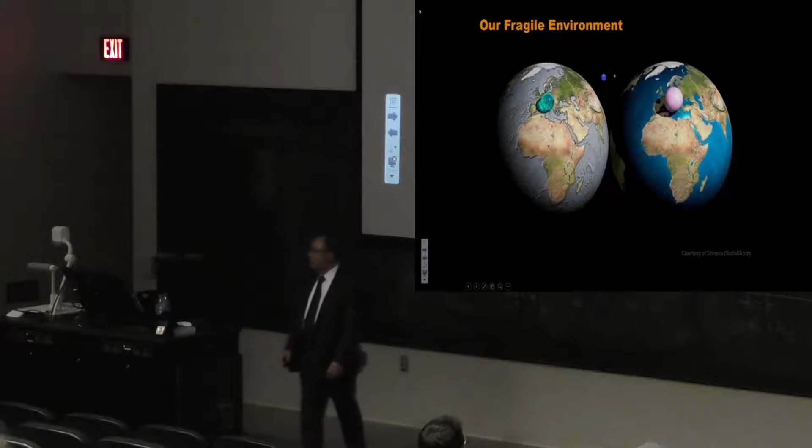So first, a little bit of background. I don't know if you've seen this image before, but the main part of it was put together by the European Space Agency a number of years ago. And it's just to give us a sense of scale about the environment that we're dealing with. So clearly, these two are images of the world. But those other little spheres on there have an important significance.

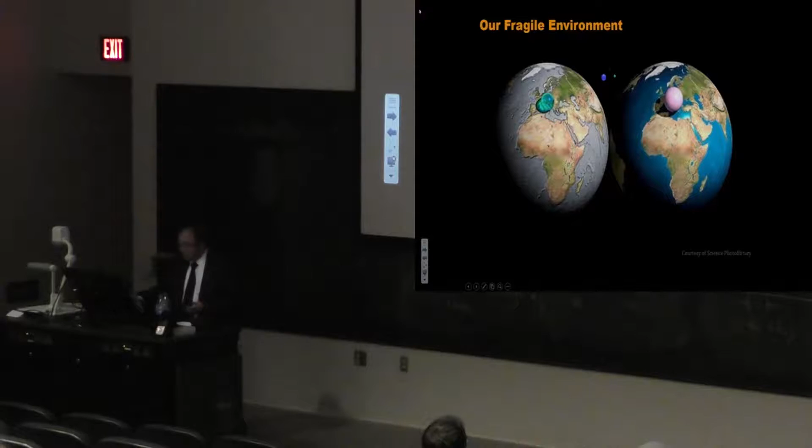If you collected together all of the water that exists on the planet's surface, the seawater, the fresh water, and everything, and put it together into a sphere, that's what you get over there, just to give you a sense of scale. That's all that there is. If you did the same with the atmosphere, you get that pinkish sphere over there. And to look at some of the others, let me just zoom in a little bit. So the Earth's diameter, 12,700 kilometers. That's the atmosphere.

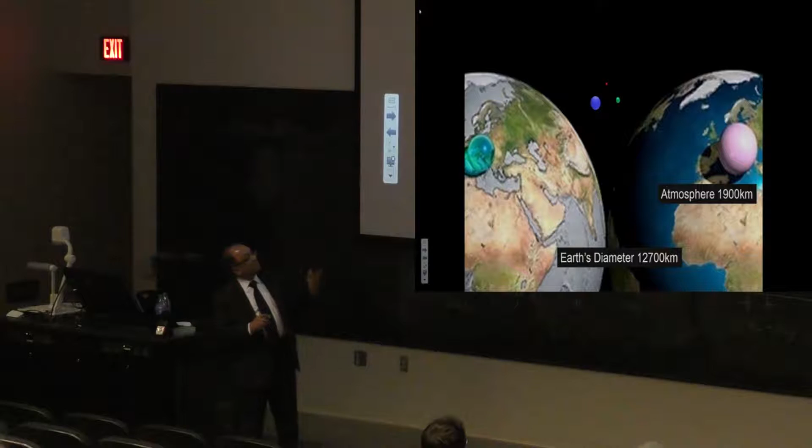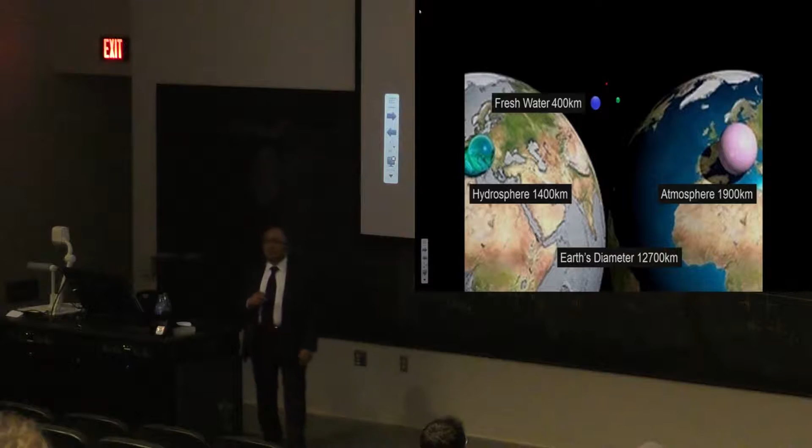There's the hydrosphere on the left. The fresh water is the blue sphere here. There's only that much of it available. The available freshwater, and by available I mean freshwater that's actually accessible by human beings for all of our activities, is an even smaller quantity. And you might be wondering what the little red dot is at the top. That's all of the fossil fuels that have ever existed. Okay, and we don't necessarily get a sense of scale about these different aspects of our environment.

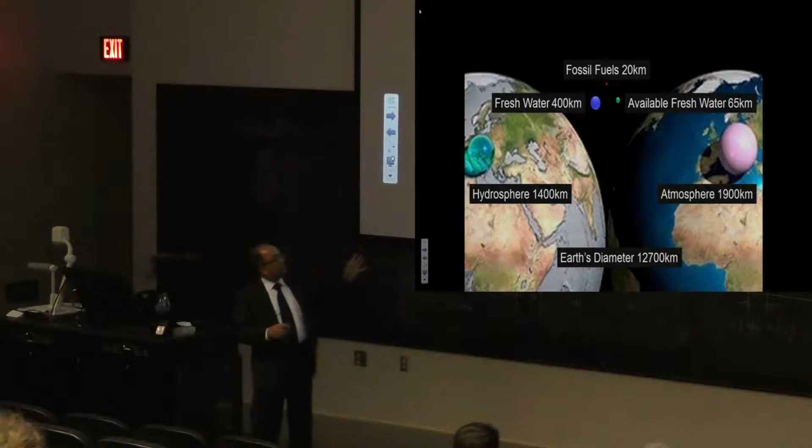The Earth seems so vast, but essentially we occupy this little thin layer on its surface, which consists of the hydrosphere, the land, the atmosphere, etc. And so with this kind of perspective, it's much more understandable how human activity can actually lead to the pollution and the destabilizing of this fragile environment.

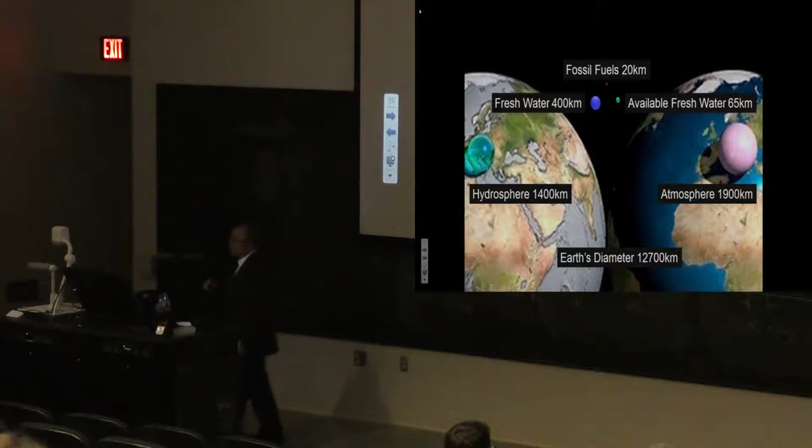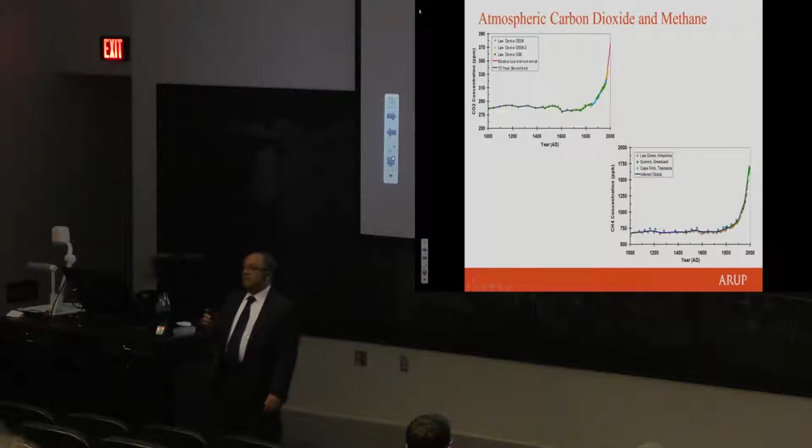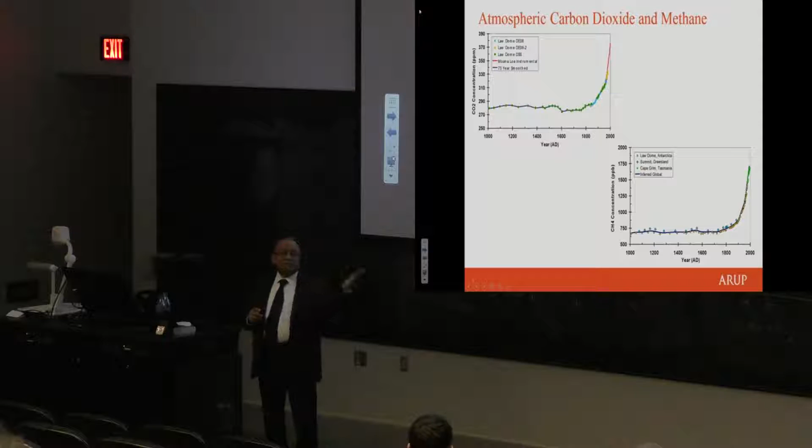And a much less talked about issue is the level of methane in the atmosphere. Now the figures for carbon dioxide are parts per million, the figures for methane are parts per billion. But methane is something like 10 to 20 times more active as a greenhouse gas in the environment. And we've been releasing lots of methane as well. And the main source of that is actually factory farming. So there is so much meat production taking place today that the methane output from all of those animals is creating measurable increases in methane in the atmosphere. Okay.

And carbon dioxide emissions from mankind are currently at about 34 billion metric tons per year, and that works out to about 5 tons per person on average, but all of us in the US actually emit on average 17 tons per person. So we're emitting about 3 times the global average.

This last number is subject to discussion, but there's growing consensus that the sustainable level of emissions, in other words, emissions that the environment can actually absorb on an ongoing basis, would really be closer to 2.5 metric tons per person, rather than the 17 we're emitting right now. So there's a huge challenge there. And all of this is known.

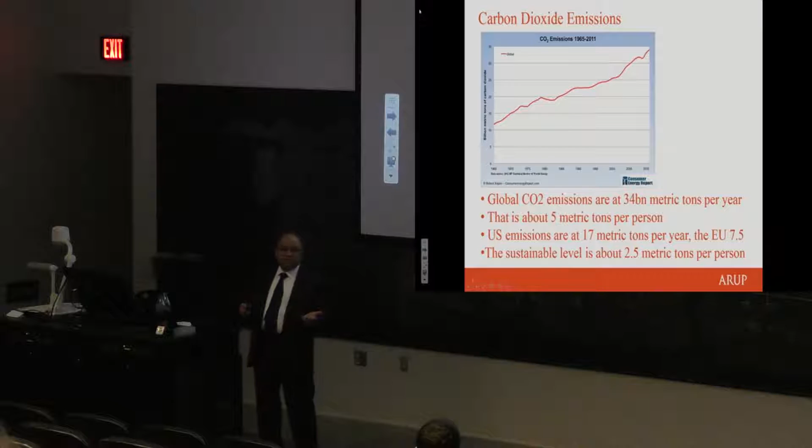Coming back to the question, what are we to do about it, particularly as professionals engaged in the building trades? I'll skip through these.

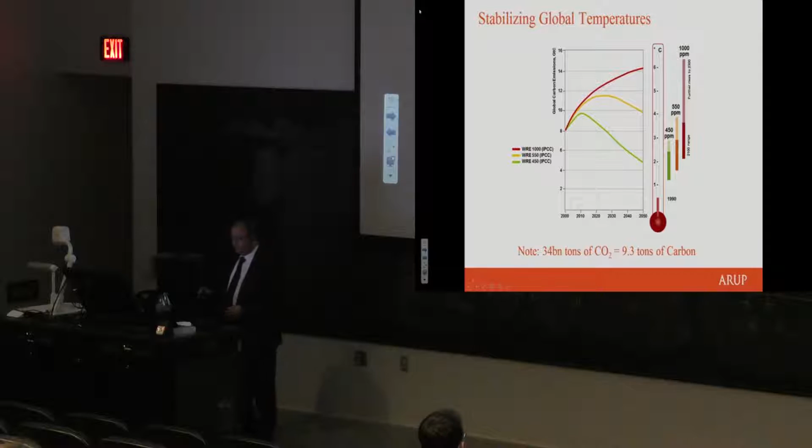These are various suggestions as to what might happen with global temperature, depending on the level of carbon dioxide. Scientists are urging us to follow the green curve down and not let atmospheric carbon exceed 450 parts per million. They say that if we actually get to 1,000 parts per million, the global temperature on average will go up by 6 degrees, with all sorts of catastrophic consequences. So again, it's a fairly scary picture.

Are we actually able to do anything about it? To try and get a handle on that, let's first look at what is happening in the US, specifically with regard to carbon emissions.

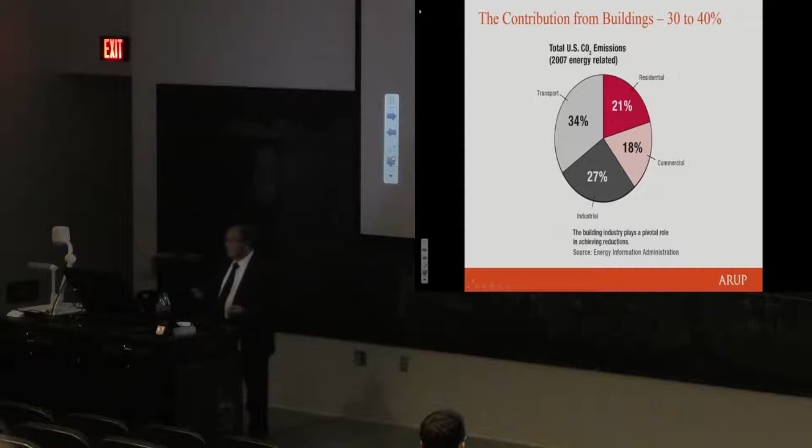You can see from this chart all of the emissions produced by the economy. 21% of carbon emissions are actually produced by residential buildings. That's much more than commercial buildings, which include all the institutional, educational, office buildings, etc. They emit about 18%, and residential emissions are 21%. So in total, about 40% of emissions are actually due to buildings.

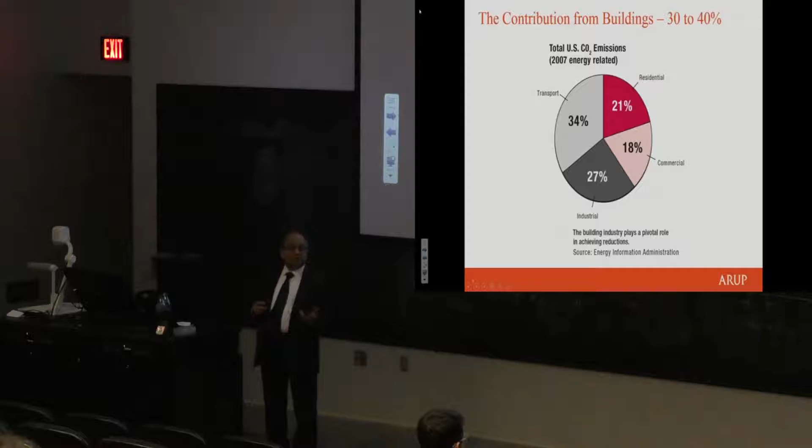So what does it really mean to us? That's what I did a little bit of research on.

The first thing is to say, okay, what sort of trajectory makes sense for America? There was a time when the Obama administration was trying to put an energy bill through Congress. It didn't actually get there.

So looking around, there are a few city jurisdictions that have actually set themselves targets. Seattle seems to be the one most aggressively going after carbon reductions within the city. I applied the sorts of reduction scenarios they had in mind to the whole American economy, and that's the kind of profile you get coming out of it.

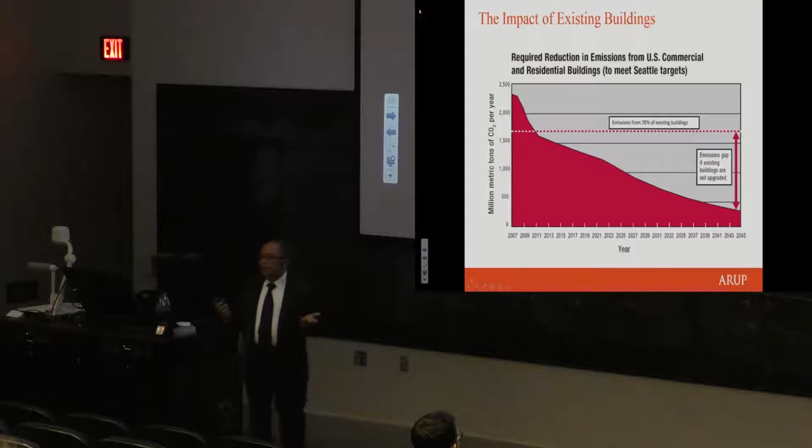Does that mean anything? Not necessarily. The important parts of that profile are the starting point, which is where we are now, and where we need to get to. Obviously, the sooner we can get there, the less impact we'll have on the environment along the way.

One of the things we have to take into account is that buildings actually change over on a very slow life cycle. If you think about the American population, it's predicted to exceed 400 million by the time you get to 2050 — I think it's about 450 million is the prediction. All of those additional people are going to need space to live in and so on.

I would suggest that the total quantity of buildings or built space in 2050 will be about 1.4 times what we have today. At the same time, buildings are renovated to some extent, but they have very long life cycles. Another estimate suggests that in 2050, 70% of the buildings around today will still be around, and they will make up about half of the building stock in 2050.

So these are all the relatively poorly performing buildings we have today that are emitting carbon at a particular rate. This dotted line represents the emissions from 70% of existing buildings. If we were to do nothing about those buildings between now and 2050, and they kept producing carbon at the same rate, we already have a level of emissions here which is significantly larger than the target everyone says we need to get to. So that's the first challenge.

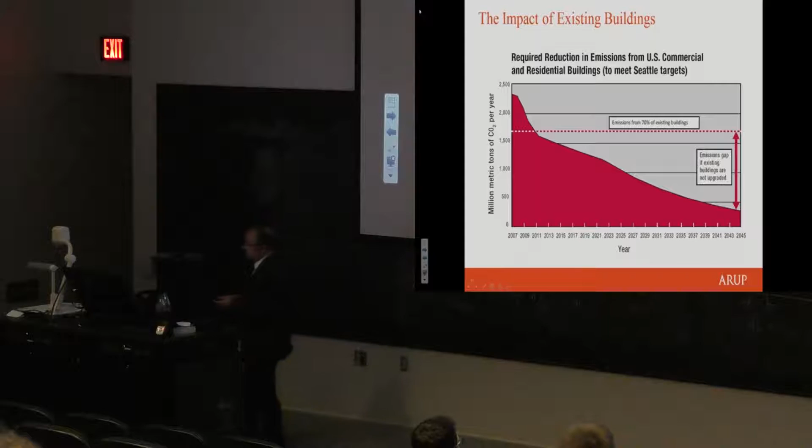Now, what about new buildings? I said that half the buildings around in 2050 will be new, half existing. If the buildings we build from now to 2050 perform the same on average as buildings today, that's how much emission we'd have in total. However, if we work hard starting now and make new buildings as efficient as possible, we still don't get to zero, but new buildings could emit something like 15% of what a code-compliant or average building today emits.

So this amount of emission we haven't given off yet could become much smaller with appropriate practice by the building industry, architects, engineers, etc. And if you look at the existing building stock, various UN studies suggest we could reduce those to about 50% of what they consume today, realistically, without knocking them down and rebuilding.

So with a following wind, everyone doing the best they can going forward to address both new buildings and the existing stock, where would our emissions be by 2050? Still significantly above, in fact 3 times what scientists tell us we need to reach. That's a sobering conclusion, and there are no signs, frankly, that we're doing things to make our buildings that much better.

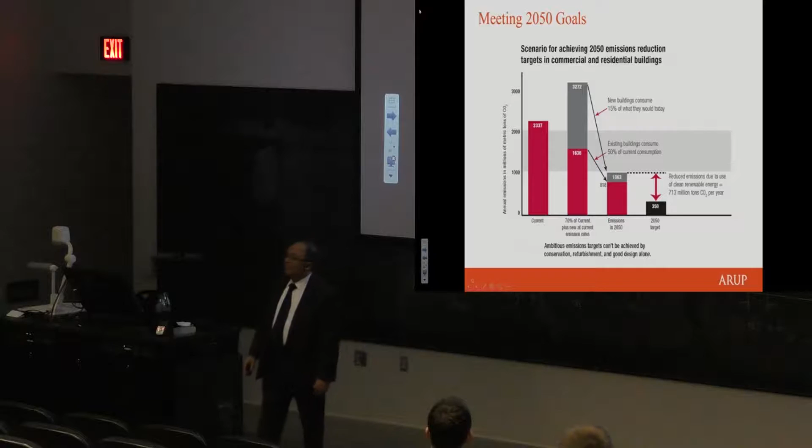I hope you'll see from this that it's important and that we should push hard. Thank you for the quote from Ove Arup—I think that was very appropriate for this. What he was saying essentially is, don't just do as you're told, push a little harder, try to get a better result. I think each of us has a responsibility in practice to do that.

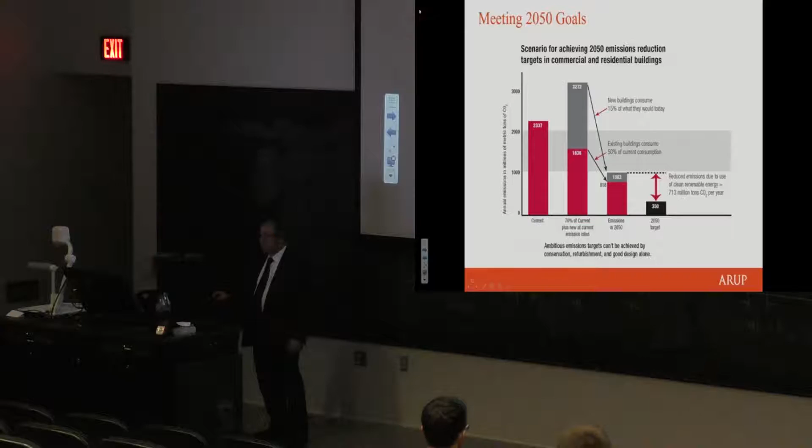The other question people often get caught up on is, what does net zero really mean? And then there are all these different types of definitions for what net zero means. Frankly, we're so far away from actually doing any of this that I think we should stop worrying about the fine academic definitions of what net zero really means, and just get on with it.

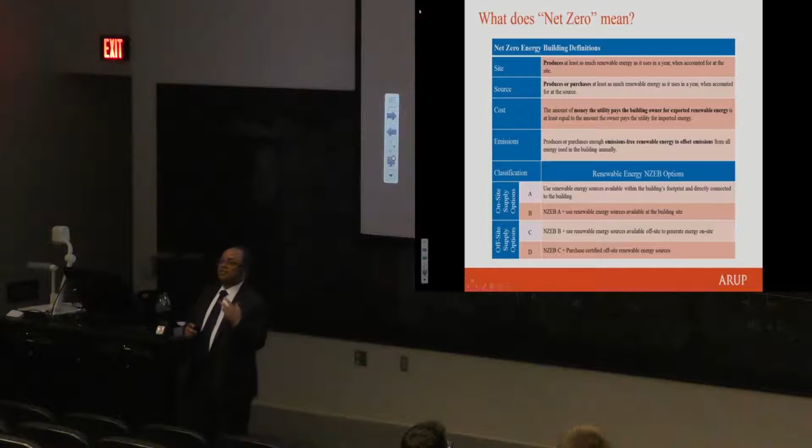The simple definition that I think will work for most of our purposes is to say that a building, over an annual cycle, generates as much energy as it consumes over that annual cycle. If we could get just to that point, I think we'd be doing an enormous amount to actually help reduce our emissions as a society.

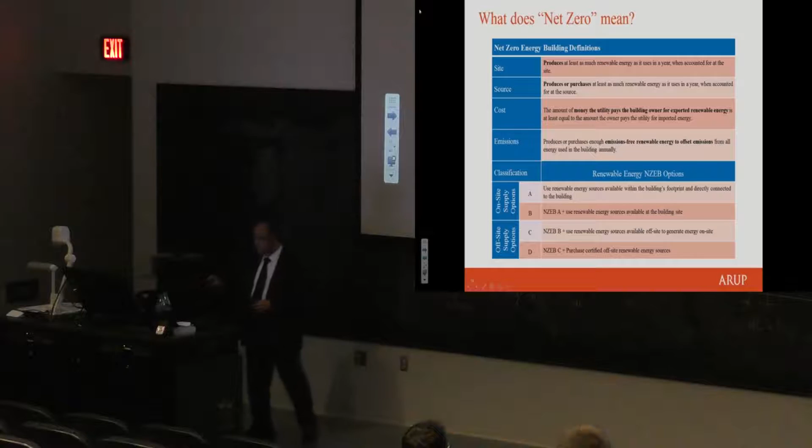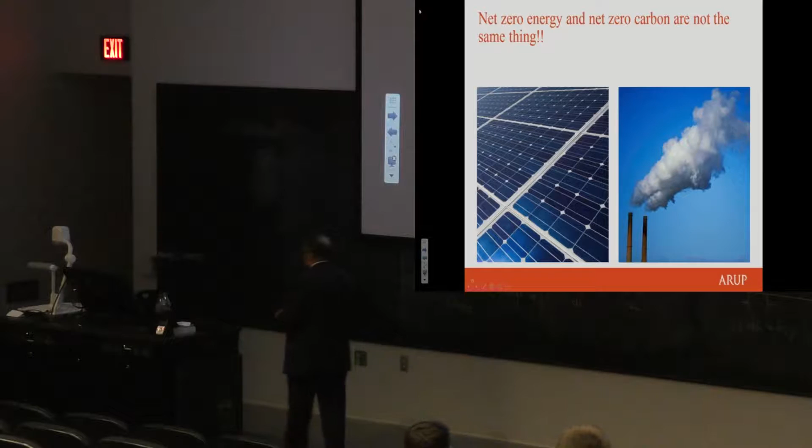Just be a little careful that net zero energy and net zero carbon are not quite the same thing, because if you're generating electricity on site using solar panels, that electricity is completely free of carbon. However, in winter months you need to import energy from the grid, which has a carbon footprint, even though you might export an equivalent amount in summer. So you can get into arguments about whether you're really achieving zero carbon by using the grid as a big battery, since you're assuming availability of energy from the grid, which typically has a carbon content to it.

But I think those are somewhat esoteric arguments, and we should just focus on making our buildings better as a first step.

So what are the stages in doing a net zero building? I think these are pretty obvious. The first one is to reduce the loading in the building as much as possible—reduce the need for energy-intensive systems in the design, and try to use passive systems as much as possible. I noticed all of the exposed concrete in this building, which suggests it actually works quite well as a passive building. I don't know if it plays out that way in reality, but passive design is a very important first step.

And it's only after you've extracted all of the benefits of those two that you would then go on to looking at active systems—actual energy-consuming HVAC systems, lighting, etc. Once you've done that, there's the whole issue of energy recovery. If you've put in a system to achieve a certain condition within the building, it's consuming energy, but it also has a waste stream of waste energy coming out. Can any of that be recovered and reused within the building? That's the next step, step 4.

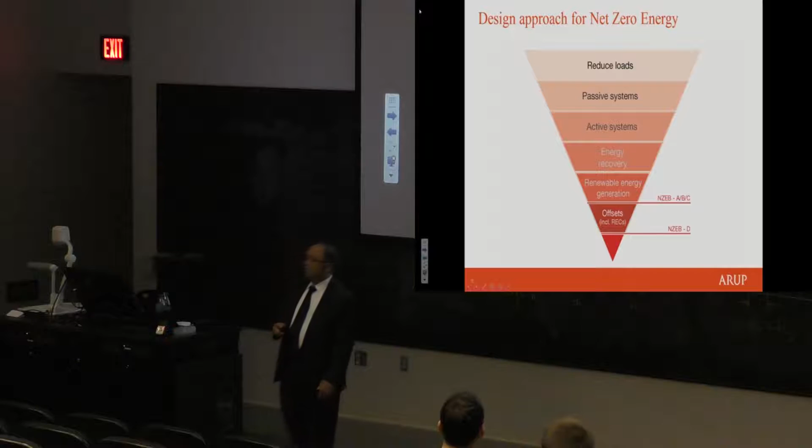So if you can't do renewable energy generation on site, the next step is to see if you can purchase green energy for the project. Now, some of these offsets have been discredited because there isn't a proper audit trail to confirm you're actually getting the green energy you're paying for. But increasingly, even our utility companies here have set up processes whereby you pay a little premium, but can be sure they're purchasing green energy to match the amount you're consuming in your facility. I'm able to do that at home, for example. I don't live in a net zero building, I'm sorry to say, despite all the solar panels on the roof.

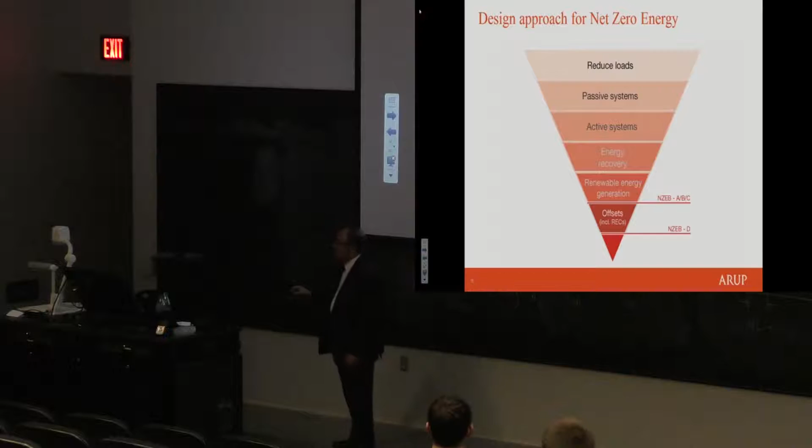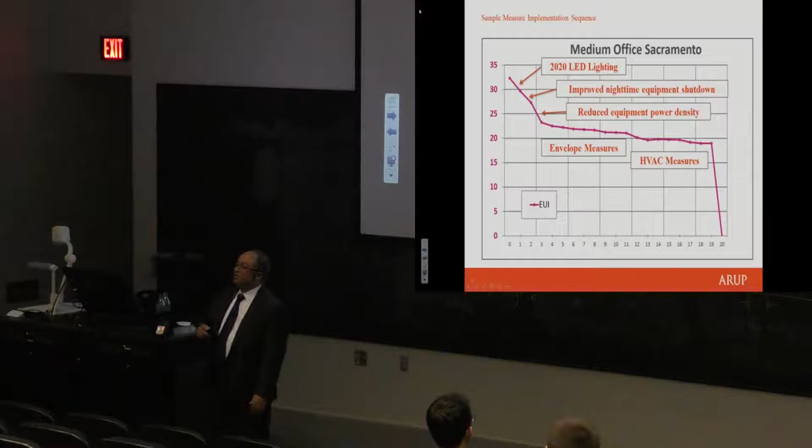So the sorts of measures you can implement in the design—these are all pretty obvious, so I'll just flick through them quickly. What this points to is that you finally end up with a certain minimum amount of consumption for your building. It's very difficult to get to an actual zero consumption building—perhaps an unconditioned bus shelter would be as close as you can get in that regard. So very often photovoltaics end up being the answer to make your building net zero.

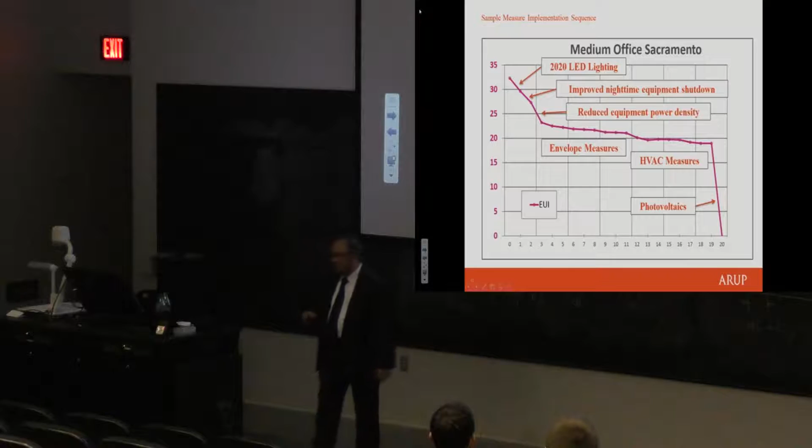Now that has consequences, and you'll see a number of buildings I show you where the photovoltaic array starts to dominate the architecture. This is something you need to think about as architects. To me, it's fine—I look at the photovoltaic array and say, great, we're generating clean energy here, but architecturally dealing with it can be quite a challenge. The other thing is the importance of scale.

If you look at just the building itself, the low-rise situation is much easier to deal with in terms of net zero. Also, buildings at a domestic scale, it's not a big challenge at all to generate as much energy as needed to power all the needs of a single-family home.

But when you get to dense urban environments, that's where you have the real challenge. However, it's important to look at this holistically, because when people live in this type of environment, there are transportation costs that come in, and the use of transportation to get to facilities, to work, to commute, adds up in terms of carbon.

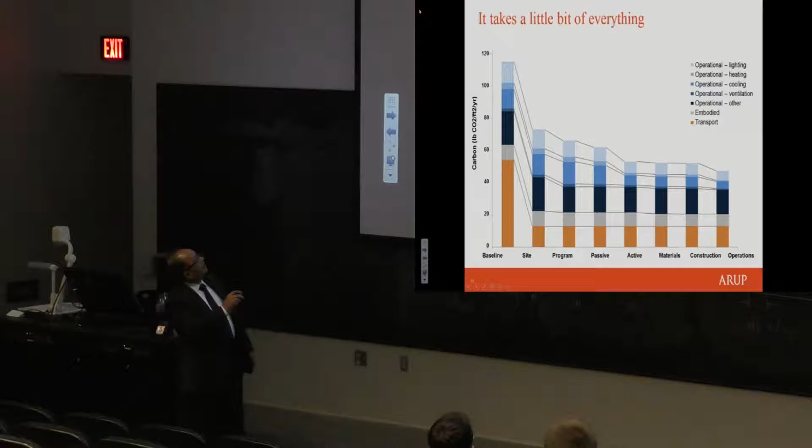So we did a study to quantify this. We initially took a low-rise development in the suburbs of New Jersey as an example. That's the graph on the left—everything up here relates to the building itself, and everything down here is the consequential carbon from having to get in a car to go shopping, etc. Adding it all up, it was interesting to note that almost half the carbon is due to transportation as opposed to the building itself.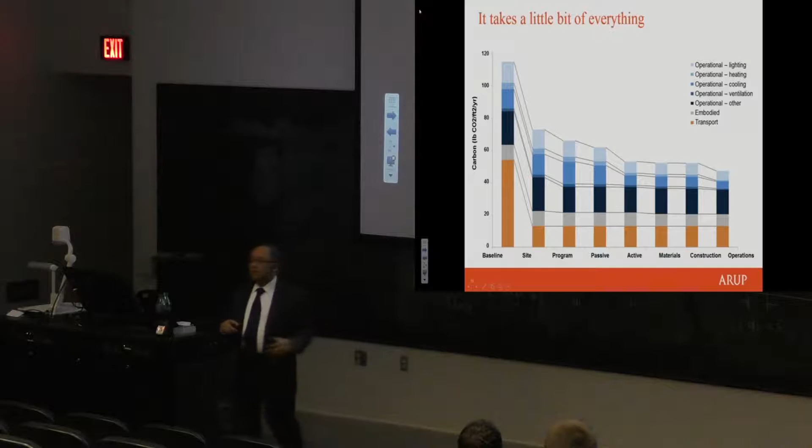So the first thing was, what happens when you move that building to an urban setting? Immediately you get this dramatic drop in the carbon associated with transportation. Now, this was a specific case study—if you change the parameters or do it for a different city, you might get slightly different results. But the point is you need to look at these situations holistically, and the fact that you've built a beautiful, self-contained, net zero building in the middle of nowhere doesn't mean it's the best thing you could have done for the environment.

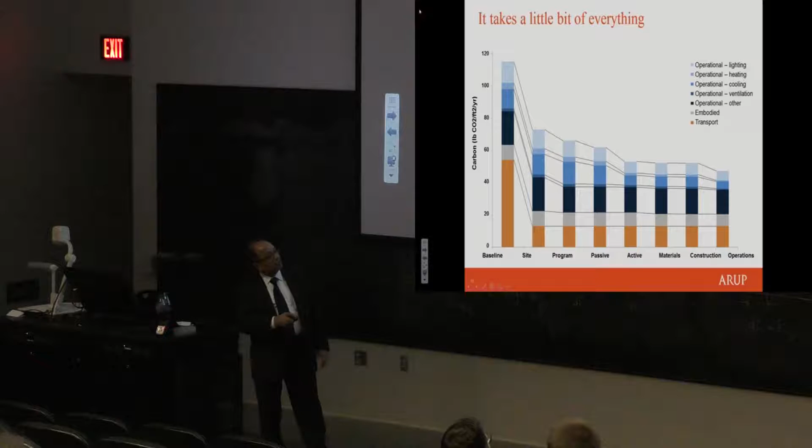Then all these other stages are different things you could do to lighting, heating, cooling, etc., to reduce the energy even further. This is about as far as we could get in this particular case in terms of carbon emissions. But the main point is that you need to draw the boundary a little wider than just the building itself when looking at these carbon accounting schemes.

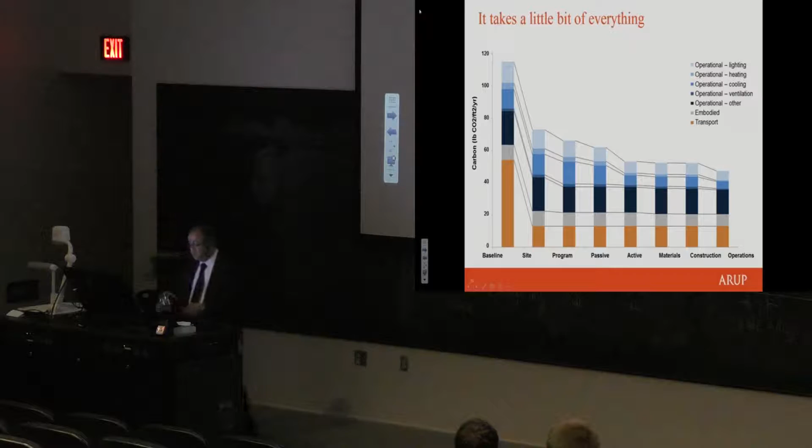This was an ambitious project that died as soon as the global financial crisis hit. But prior to that, these developers in Florida wanted to build a city that holistically considered transportation, etc., to achieve very low levels of carbon emissions. We started off with the average in Florida, which is 16 tons per person—I told you the national average was 17. It's a little lower there because of the slightly more benign climate.

Interestingly, you could make significant reductions just with density and land use strategies, by encouraging walking and all of that in the way the city was laid out—transport modal share and capture rate, meaning how many trips you can capture with public transportation versus people doing it themselves. Then there are energy demand reductions in the buildings themselves. These two elements are really more to do with transportation and urban design than with the individual buildings.

Then you get down to individual building reduction, and then alternative energy supply—generating energy on site, which in Florida would work extremely well. It's interesting to note that the regulations in Florida actively discourage people from exploiting solar energy. Scary, but that's the case.

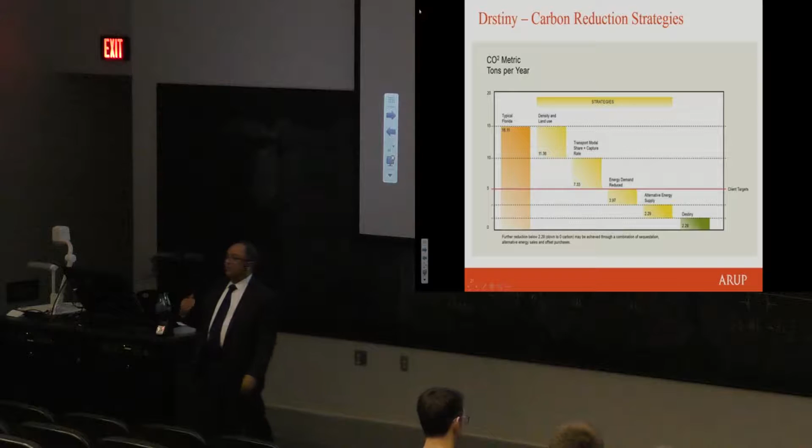We were actually able to get this total. Of course, this is theoretical—this was never built, and the big challenge is always to try and get what's actually built to match what you're designing or your intentions. But we showed it was possible to get down to 2.29 tons, which, if you remember from earlier in the lecture, is more or less the level considered sustainable. So what I draw from here is that we're not chasing something impossible, and we should actually be able to do a lot better than we're doing now in terms of carbon emissions.

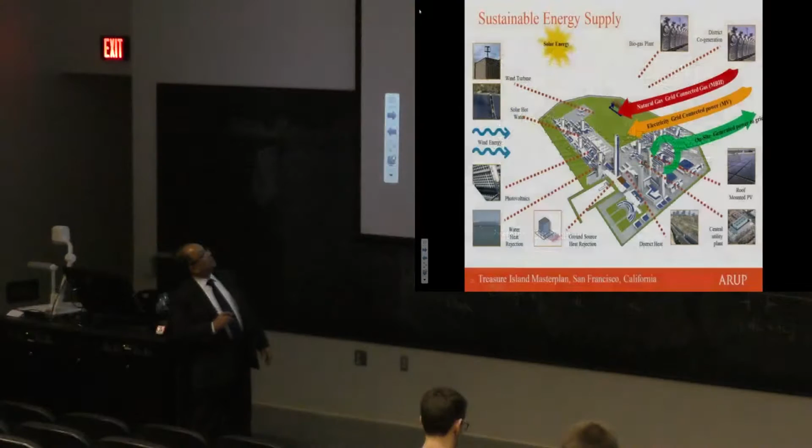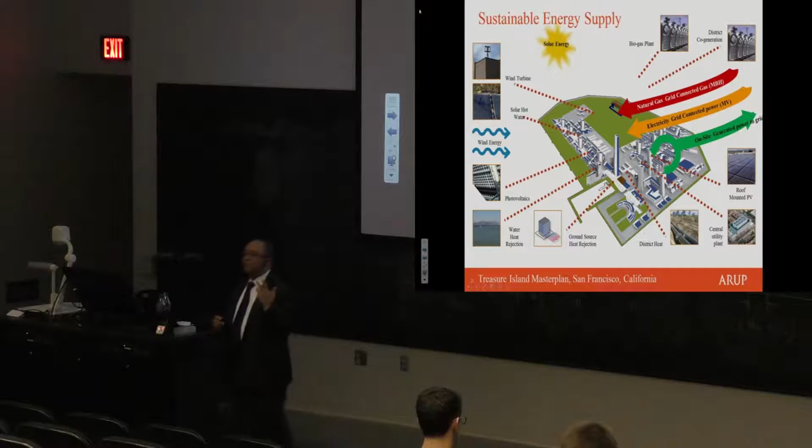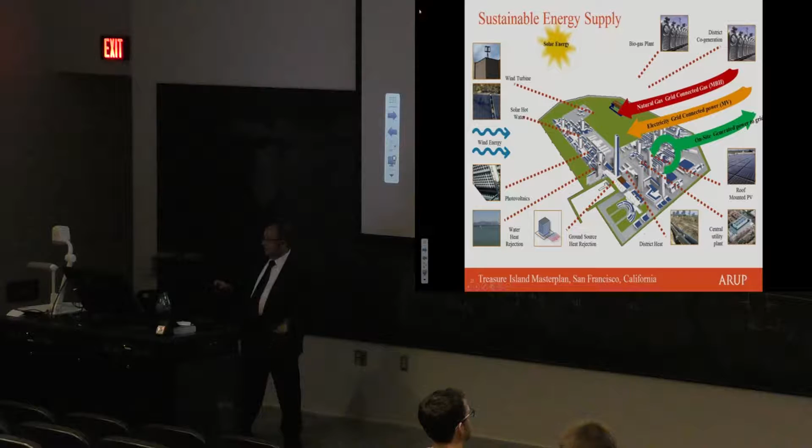The issues are complex. The Treasure Island development in San Francisco also started off with very high ambitions, which ultimately were not met, mostly for economic reasons. But in studying that particular project—I'm not going to explain this slide in detail—it's just a way of showing all the different considerations that come into figuring out the carbon footprint of a development, and all the different moves you need to think about to achieve a better design. That was done fairly rigorously for this development. It's a real pity it didn't proceed as planned, but it's still out there—it may yet happen.

There's also a seasonal graph that you have to overlay on this. I know from my own solar installation at home that generally I'm in surplus through the summer months, and I'm in deficit through the winter months, and the shoulder seasons more or less balance out. Seems obvious, but that's where we are with that.

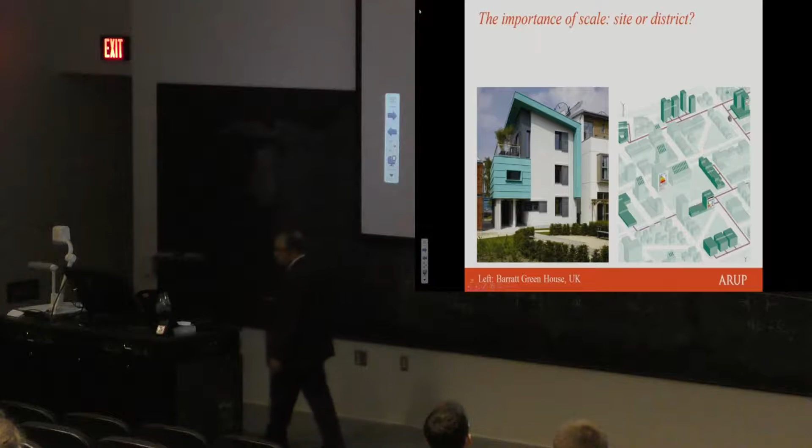So, are there examples of net zero buildings actually coming into the marketplace in a more ubiquitous way? There are in other countries. There are various commercial house developers in the UK that actually offer you a net zero product. This is one of them - Barratt Homes, I think it is. Yes, Barratt Homes.

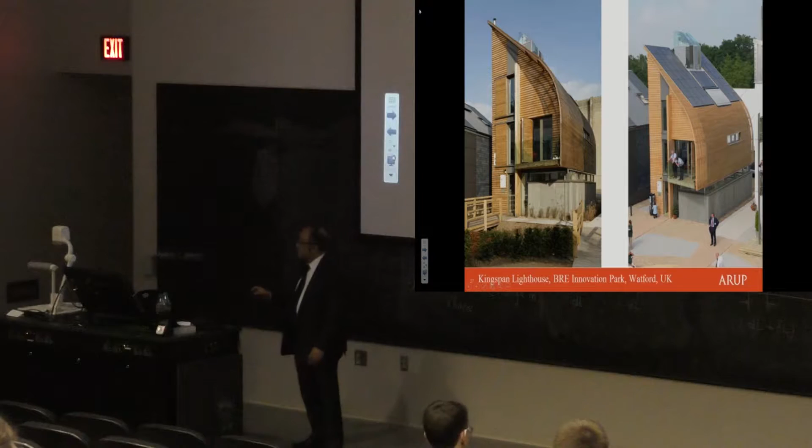And this is another one, the Lighthouse. I think this was more a demonstration project. Only one of these exists, as far as I know. They didn't then replicate it, although the design has been fully worked out.

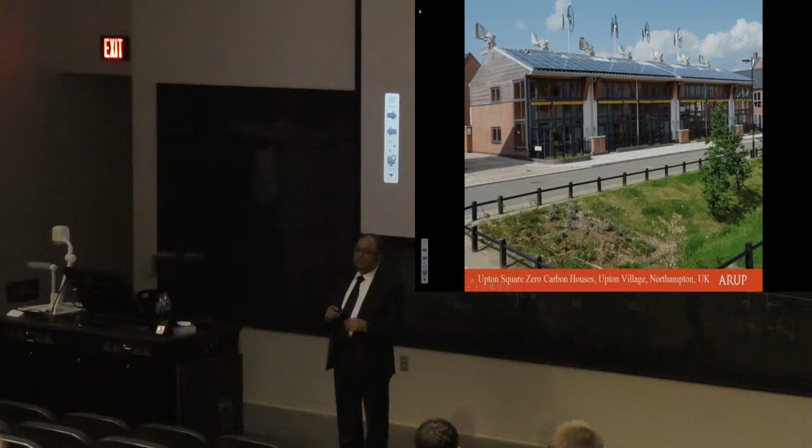And the best place for wind turbines is actually away from populated places, and the bigger they are in terms of diameter, the better they are in terms of efficiency. Also the bird life is able to deal with the bigger turbines more easily than with the smaller ones. So one of the big problems with wind farms is that you have a lot of bird hits on the blades, and then keeping them out of migratory paths and all of those things. That hasn't been considered enough, I would suggest, but the bigger turbines do better with those situations.

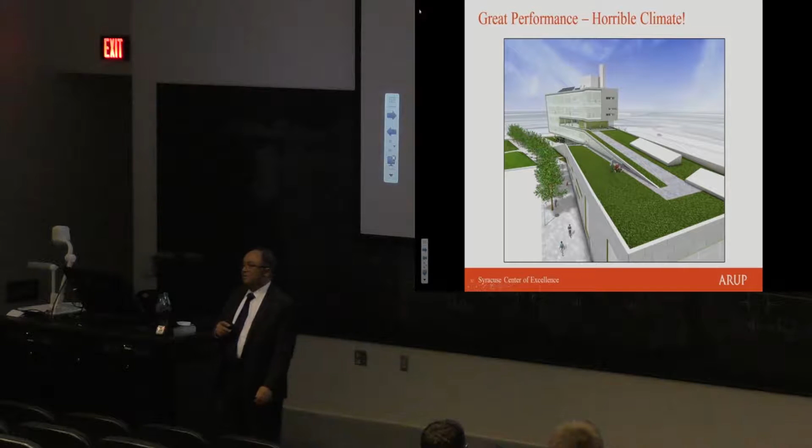Okay, also the impact of climate. There are many parts of the US where the climate is so benign that you could very easily, with careful design, actually achieve net zero. So this is the Renzo Piano building in San Francisco. It's very lean in terms of its energy requirements, but then it's in a place that helps you along with that. On the other hand, this project - sorry, I should replace this with an actual photograph of the building itself - Toshiko Mori's building in Syracuse. It's an extremely harsh climate, so to achieve a good level of performance here was so much more difficult given the Syracuse climate than it was in San Francisco.

Now, regulations have an important part to play in all of this. There's one argument that says just leave it to economics - the market will take care of it, and as the consequences of carbon and so on become manifest in the marketplace, economics will drive you towards appropriate behavior. I don't buy that for one minute. I have a few examples from my own experience.

So around 1999 or so, we were engaged by the United Nations to do a capital master plan for their entire site in New York. A part of that was to really look at their energy consumption and emissions within their facility. When we did the study, it turned out that those buildings - they were beautifully designed, I must say, as we went into the drawings and actually took apart the facade on the Secretariat building. You could just see the care with which that whole complex of buildings was designed and constructed. But anyway, we found that the energy consumption was ridiculously high.

It was something like 4 or 5 times what a contemporary code-compliant building would consume. So obviously, anything we could do to reduce energy would be important for the future of the project and for the refurbishment. So one of the things that came up was, should we change the facade on the Secretariat building? It was a single glazed facade, so it had no real thermal value, and the glass was clear, although there had been various attempts at various times to put reflective films and things like that. They were never successful.

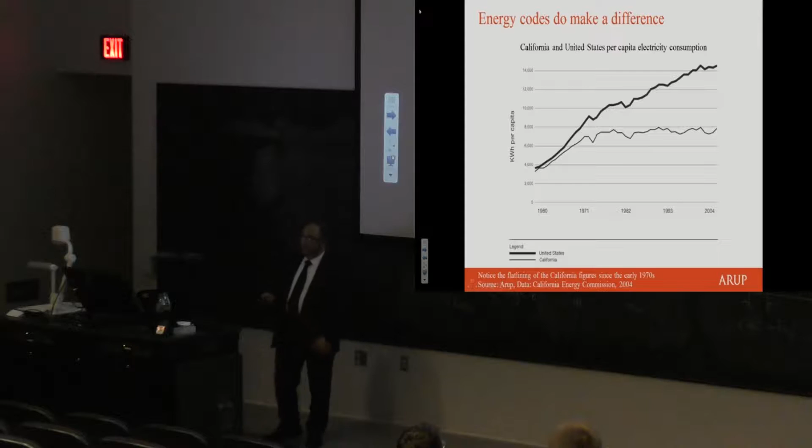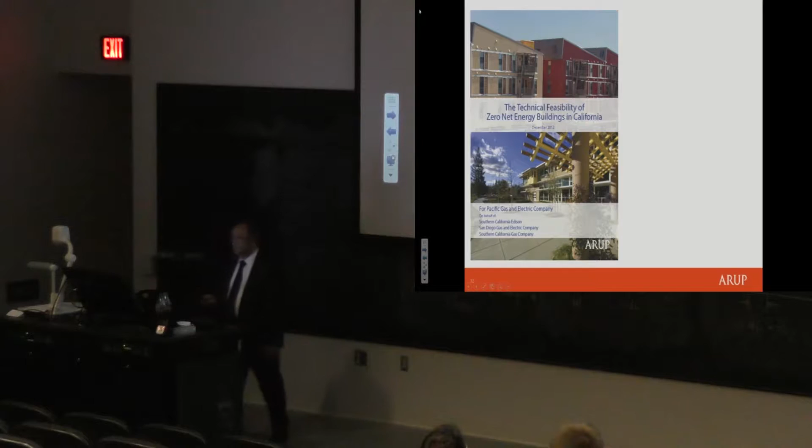If you look at the US as a whole, that's what's been happening in the country as a whole. And the only difference is that you have these strict regulations in California where they're focusing on energy consumption, they're implementing energy-saving measures in their vehicle fleets and buildings, etc., and that isn't being done everywhere else. So this isn't economics, it's pure policy at work. And at ARUP, we've got a research wing that actually helps authorities develop guidelines and so on for net zero buildings, amongst other things. That's just an example of those.

So another trend is, of course, the whole ASHRAE code for energy conservation, ASHRAE standard 90.1. And this is just a graph showing how the requirements in that code have been ramped up year on year. And what usually happens is ASHRAE will produce a new version of their code. It'll be out there, people will look at it, and then various jurisdictions will start adopting it for use within their state. It usually happens at a state level, sometimes at a city level. So again, some jurisdictions are quicker with this and they'll adopt the latest code pretty quickly. Others are a bit lazy about it, and they'd still be referring to a code that's several generations old. So you might say that yes, your state energy code is based on ASHRAE 90.1. It's very important to ask the question, well, which version of this, which particular year is it based on?

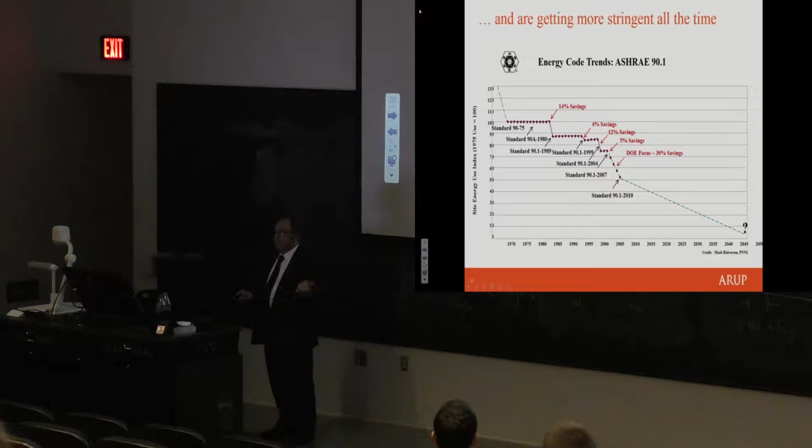And the thing is that even with the most stringent standard today, which is quite hard to meet, we're still nowhere near getting close to something that would help us with our carbon emissions unless we also go the extra mile on the generation side to put in the energy generation. Now, ASHRAE as an energy code is basically limiting your consumption of energy in the building. Are there any codes out there that actually mandate the need for net zero buildings? Well, not in the US and not yet, but it's expected that US federal buildings will be required to be net zero by 2030. There's a plan for that. Will it come to pass? We don't know. 2030 is a long way away.

But the United Kingdom, as of this year, is already requiring certain types of residential buildings to be net zero, and various European Union regulations are also coming in within the next few years. There was some talk of California residential buildings having to be net zero starting from 2020. I don't quite know where that is at the moment. I don't have the latest information.

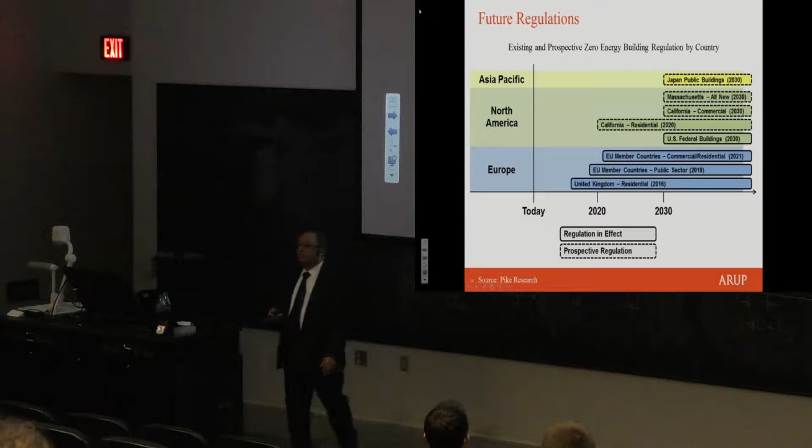But you can see that the US federal standard there is a regulation that's already in effect, but 2030 is a long way away, as I said. And these EU and UK regulations are also already in effect. So there is momentum building. The question is, can we do it quickly enough? But I would say that the speed at which we implement these things is less important than the effort we put in to just make a difference in every project that we're doing, to do more than just the bare minimum.

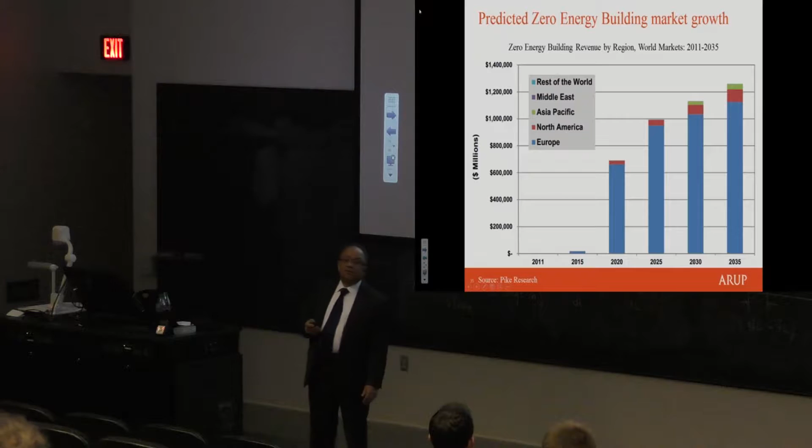So there are various predictions of market growth in net zero buildings. And you can see that the prediction in 2015 was pretty small, but for there to be a dramatic jump in net zero buildings, mainly driven by the European market. And we're beginning to see that happen already from our activities in Europe. In fact, when we got involved in the design of the US Embassy in London, the criterion for that building started off being net zero, that it would actually generate as much energy as it would consume. Interestingly enough, after two rounds of value engineering, it's back from that particular target, but nevertheless, it's doing a lot better than a simple code compliant building.

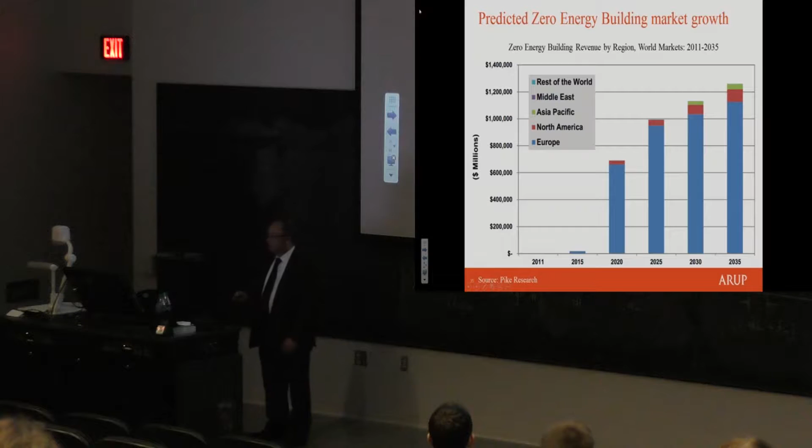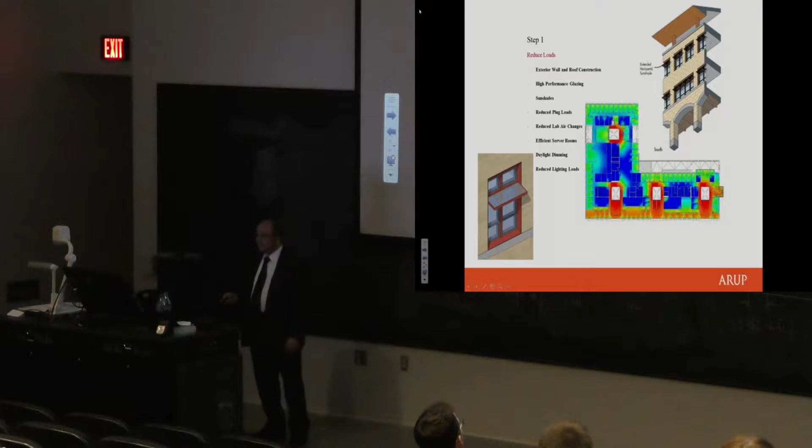So some more examples. Again, you'll find some of these are in climates that are much more benign. I don't want to take up too much time going through them in detail, but you can see the combination of passive and active means to achieve low energy performance. There's one example that I know of a net zero building in Hong Kong. This one recently opened. I don't have the actual photography for it, but again, you can see the dominant solar roof on the project, along with a bunch of other strategies, including the use of fans rather than air conditioning in some of the spaces.

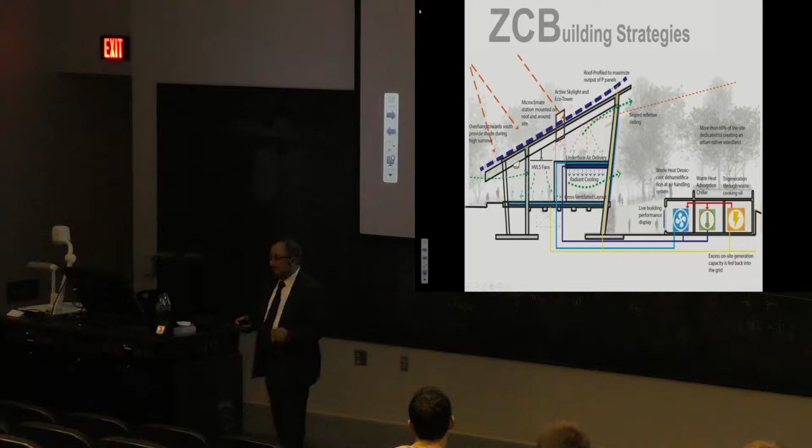I'm actually surprised that outside of the domestic sphere, we don't use ceiling fans more in the buildings that we build here. We tend to go straight for the air conditioning. They are actually a very effective way of improving comfort, particularly in spaces where the comfort is not that critical. They can allow you to get rid of air conditioning, but create an environment that's much more pleasant than just sitting there in still air at that particular temperature. Just in case anyone decides to call me on this, a ceiling fan does not cool the air. It's just moving the air around, so it's giving you a perception of improved comfort rather than reducing the temperature within the space. But it can be effective in certain applications.

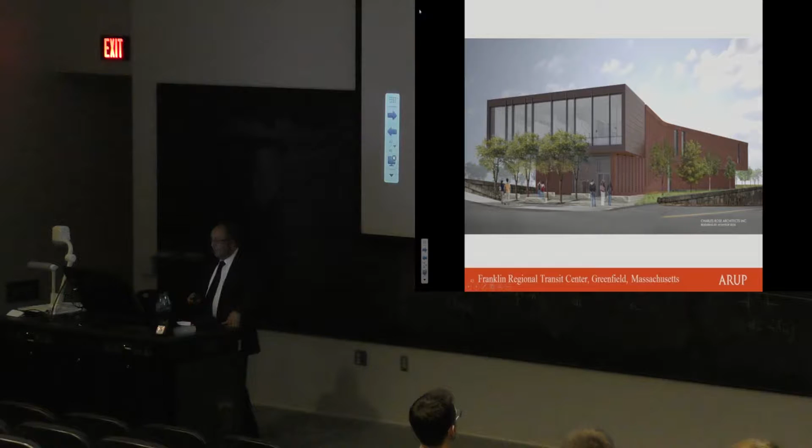Samsung putting efforts into developing these projects. This is also a project that opened recently in Massachusetts. It's a transit center, the first one in the country that's net zero. And you can well imagine that the roof is covered in solar panels. It is. And a courthouse as well. This is still in development. In this case, there are wind turbines as part of the project, but they're located on the site rather than on the building, which is a little better. Massachusetts is kind of on the edge as to whether wind turbines actually work there. So let's see how that goes. I've seen a few motionless wind turbines in the Boston area.

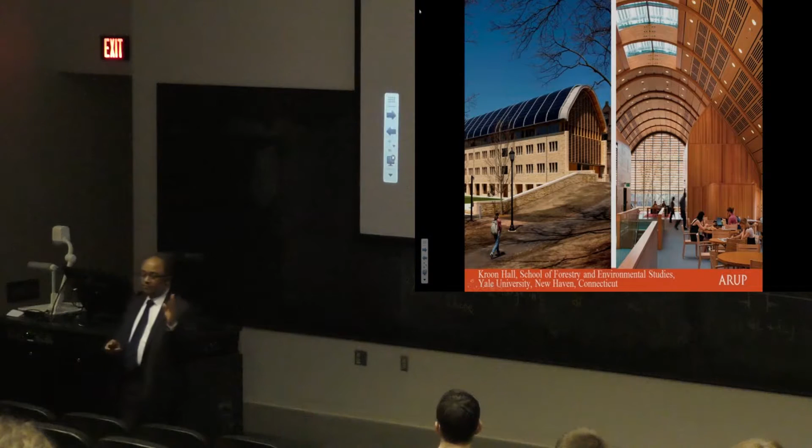And then there are buildings like this one, Kroon Hall. In this case, we couldn't actually get the building to be net zero in and of itself, but Yale decided that they would actually buy audited offsets to make up the energy that they couldn't generate on site with the solar panels that are on the roof. So it's net zero in an overall sense, but not in a site sense. And then this is PS62 on Staten Island. Again, notice the fact that the solar panels essentially take over, right?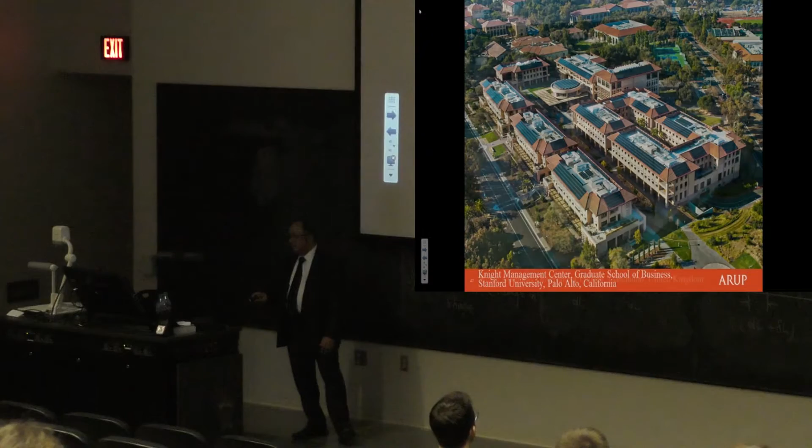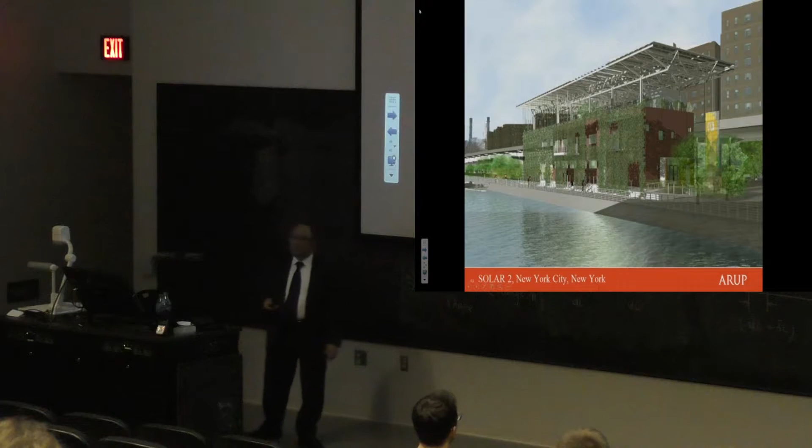And one particular building typology that you'll see coming up more and more, and I'm going to finish with some examples of these: the building underneath with a solar canopy at the top, creating a space underneath the canopy that can be used for various things, using the canopy for generating energy as well as collecting water. That you'll see coming up more and more, and I have a couple more examples. So this is one we're doing in New York City. It's a project that started years ago, and it's still just chugging along.

Meanwhile, there's this one in Acapulco that started much later, and it's nearing completion, actually. You can see the photograph there of it nearing completion. I'm perturbed to see that there are no solar panels on the grid that's up there. I hope that's because they just haven't installed them yet, and not that they've been value engineered out of the project, which would make a nonsense of this entire canopy structure up there, which was supposed to create shade and capture water in a semi-arid part of the country, etc.

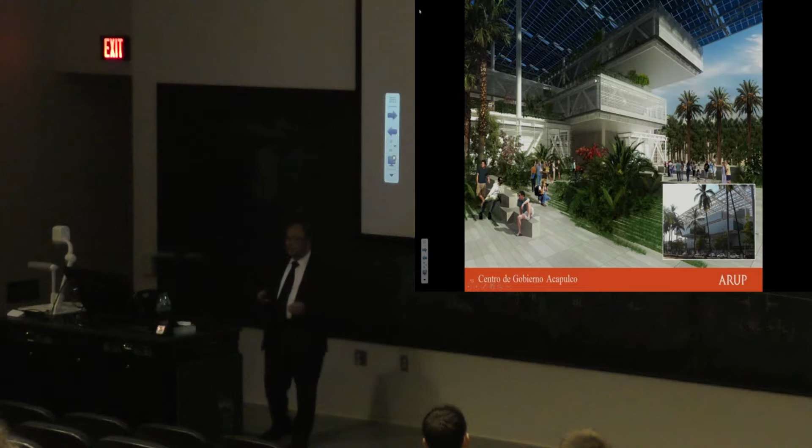So one of the other problems at some of these buildings is that the generating facility actually becomes an important part of the architecture, and what happens if it's removed for some reason? The whole concept falls apart. Enrique Norten is the architect for this, by the way.

And yeah, I think that what is interesting about this one is to hear the architect in his terms talk about the importance of it being a net zero building. So it's, I think, a message to all of you that you need to figure out your own positions with regard to this, why you think it's important, why and how you're going to build it into your projects, and what you say about your projects.

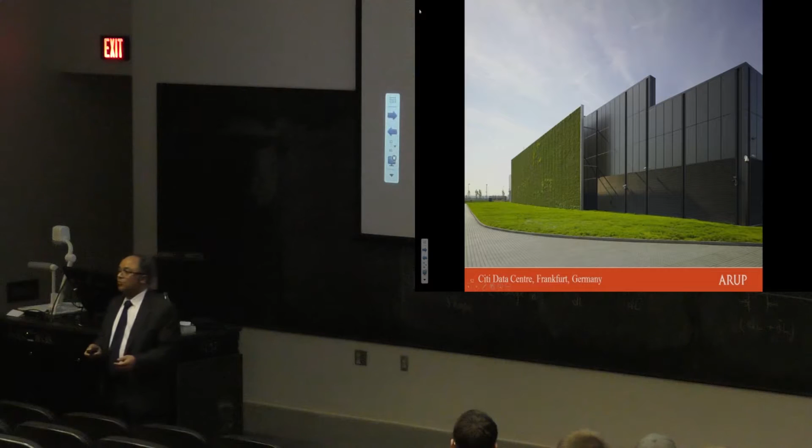Right, and this is a bit of an aside here, really. A data center. So we all carry around these little devices, and we're extremely happy with the fact that you charge it up once a day, and it lets you do all this stuff throughout the day, and it seems to be extremely lean in terms of energy consumption, etc. Underlying all that technology, you have monsters like this. This particular one is not so much of a monster because it was perhaps the first attempt at doing a green data center.

There are some estimates that suggest that 2% of global carbon emissions are due to electricity consumption in data centers. So these things are not put in population centers. They're usually in the middle of nowhere, close to sources of power, or in environments where you can get cooling more easily or whatever, and they are huge energy hogs. And the whole internet technology revolution is really built upon these things.

And the traditional way of designing these was to basically sacrifice everything for the sake of reliability. So many of them would even have systems where you were simultaneously heating and cooling because no one cared about the energy consumption. It was the reliability that was uppermost in people's minds. So there needs to be a whole refresh of data center design to find ways of minimizing the energy consumption there, because as I say, it's a huge load and one that we're probably not aware of at all in our daily lives.

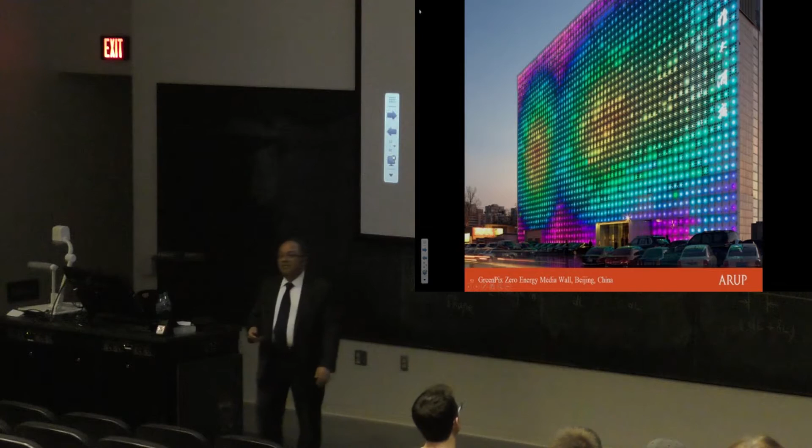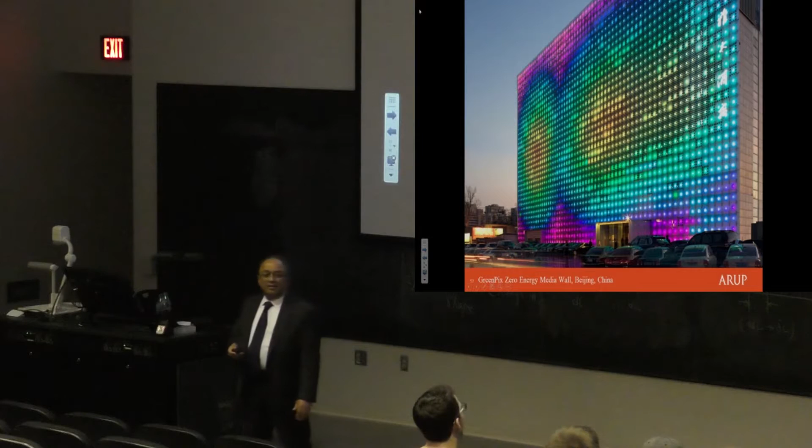And this is just a bit of fun. It's a display on the side of a building in Beijing that's made up of both solar cells and LEDs. And during the daytime, the solar cells harvest electricity. It's stored in a battery. And at nighttime, you get a little art show on the facade, and it runs until the electricity runs out, and then the next day the cycle starts again.

Okay, so one of the challenges has always been in the urban context: can you get enough energy harvested in a high-rise building to meet all of your needs? And the answer until recently was no. We did a research project with an architectural firm called Kiss + Cathcart and Rutgers University, and started looking at various technological trends that include high-performance glazing and glazing that has selective coating so that it lets the daylight in and keeps out infrared and ultraviolet radiation. So that's what you can do on the facade to reduce solar heat gain while optimizing daylight.

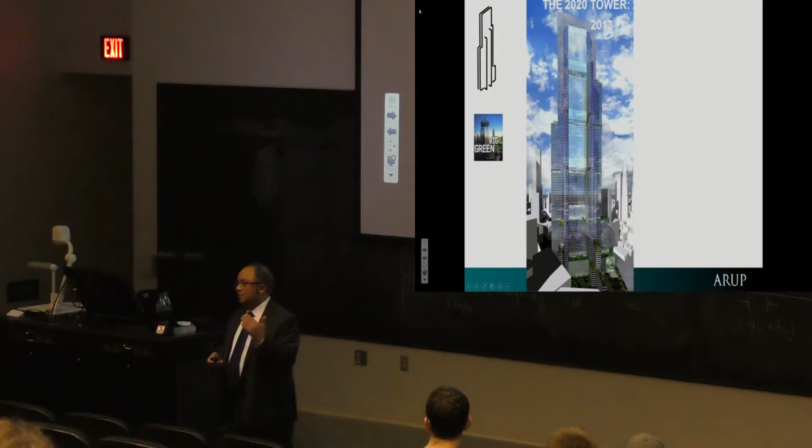LEDs are becoming more and more efficient. So at the moment, commercial LEDs that you can buy are slightly more efficient than fluorescents, but if you look at the trajectory that they're on, by 2020, they're going to become very much more significant in terms of their efficiency. Similarly, photovoltaics are on a trajectory of increasing efficiency as well. So currently, you can get panels that are somewhere in the 14 to 18% range. So 14 to 18% of the solar energy is converted into electricity. By 2020, we expect that there'll be commercially available panels that are closer to the 25 to 30% range.

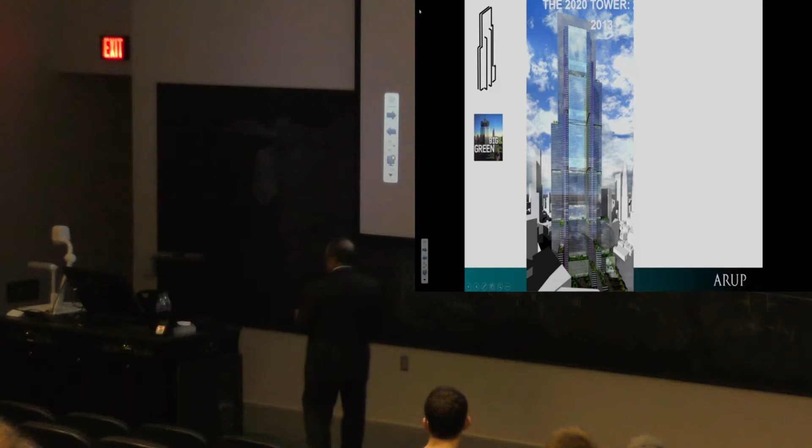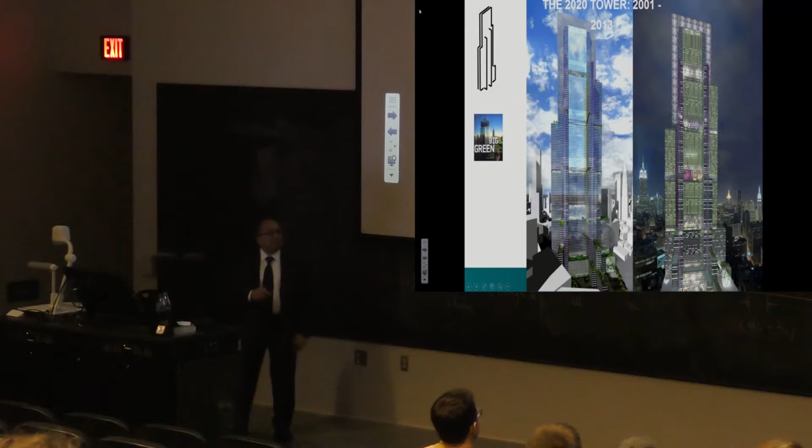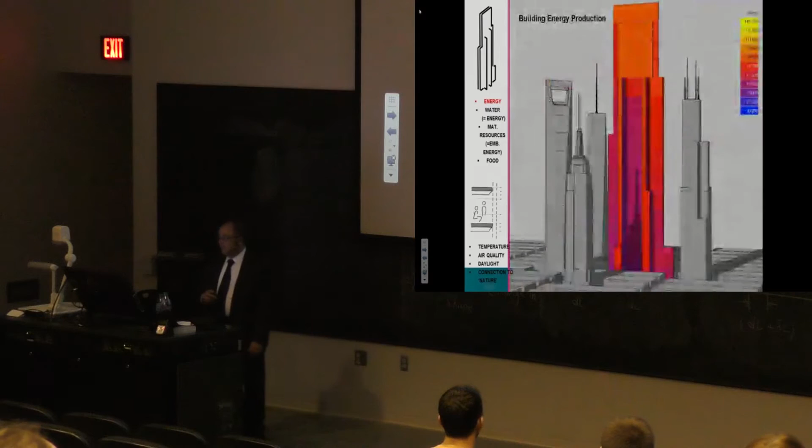So you put all of those technologies together into this hypothetical building. I should spend a moment on this one. This was the earlier version, which is awash with wind turbines, as you can see. In the 2013 version, we got rid of them because in the meanwhile, we learned about all the problems of sticking wind turbines on buildings. Anyway, it's a theoretical study, but the good conclusion coming out of it is that you can actually get to net zero even in the context of a high-rise building.

We did this study to actually put it in the context of other tall buildings, plucked from all over the place, so that when we studied it, we didn't assume there was no overshadowing from adjacent buildings. Even with a certain amount of overshadowing, given all these improvements in efficiency and technology, we can see a way to even high-rise buildings being net zero by 2050. It's not possible with today's technology, but things are moving in that direction.

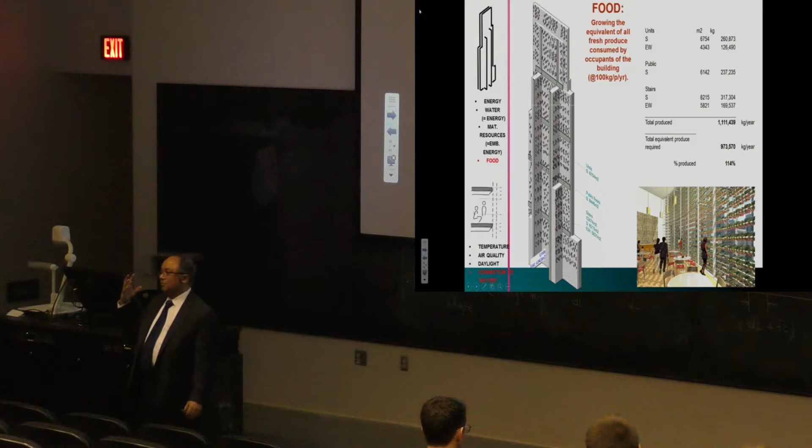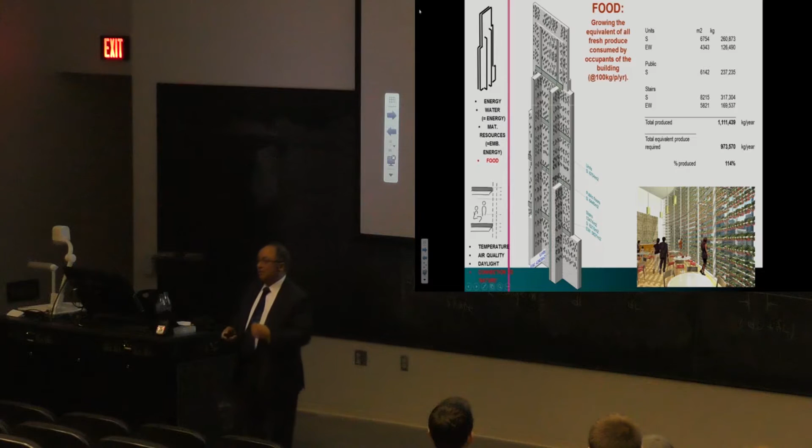Just for a bit of fun, we also saw whether we could incorporate some kind of food production into this facility, which is an interesting thing to think about. A lot of our food is transported long distances, and one way of considering whether that's the right thing to do is to look at the calorific value of the food versus the amount of energy consumed in the transportation. You find that transporting high calorie density foods like grain or sugar makes more sense than transporting lettuce. Lettuce, tomatoes, these things have very low calorie content - they're mainly water. So I'd suggest it's much more important to try and buy those water-heavy types of produce as locally as possible, to avoid the transportation impact on carbon.

Okay, so to conclude with this - you can see I like these spheres to give scale to different arguments. At the moment, if you took all of humanity and figured out the rate at which we're consuming energy, and normalized it to be electricity - yes, we're using energy of all sorts of different types, but we normalize it - you find that our continuous rate of energy consumption is at 15 terawatts.

Now, the issue is that one third of humanity has no access to modern sources of energy at all. They're still using firewood, animal dung, agricultural waste, and so on as sources of fuel. One third of humanity has a kind of intermittent access to energy - it's not like us, where you can flick the light switch and have a 99.999% chance that the lights are going to come on. There are places where the probability is a lot less than that, with regular power cuts and so on - that's another third of humanity suffering that. And then there's a third like us - we're lucky to have full energy security and availability.

Putting all of that together, the consumption is 15 terawatts. So if all of humanity actually had access to energy like we have, it's estimated that this number will go up to about 30 terawatts of consumption. Now, the UN predicts that global population is going to increase from the 7 billion or so that we're at now, up to 9, maybe even 10 billion, and then stabilize and start coming down. So for a world population of 10 billion, what does this number need to be? It's 45 terawatts - to give all of humanity at its peak size access to energy similar to what we have today. That's how much wind power is actually available if we were to go out and get it. That's how much solar power is actually available if we were to go out and get it.

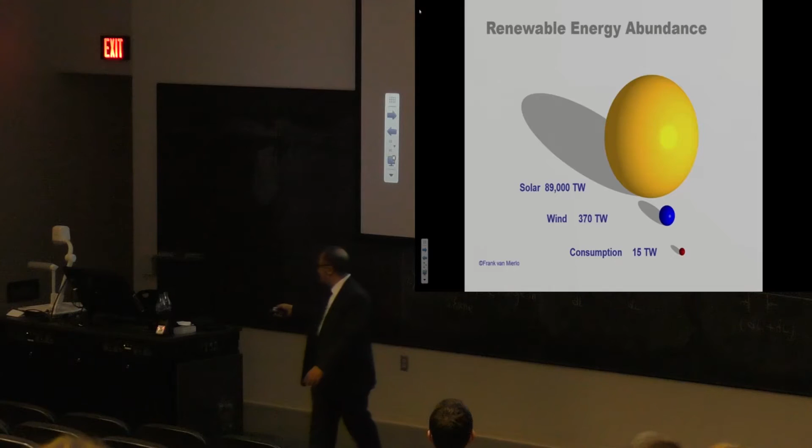At this school, I appreciated the lecture as always, and the focus on net zero. At this school, the landscape section is leading the architecture section in their interest in environmental issues, and the way they're doing that is primarily through urban considerations. I was wondering if in your office there are urban scale issues that complement your architecture issues, or do they approach the problem differently? Where is the landscape and the urban component of the same problem? If I perhaps didn't do my research enough... I'll ask that question rather than letting them ask it. I came prepared to talk to a room full of architects, so I focused on the buildings. But on the way over here, I read up a little about the school, and there's the landscape and the whole urban side of things as two other wings, and I'm assuming there are people in the audience from those backgrounds as well.